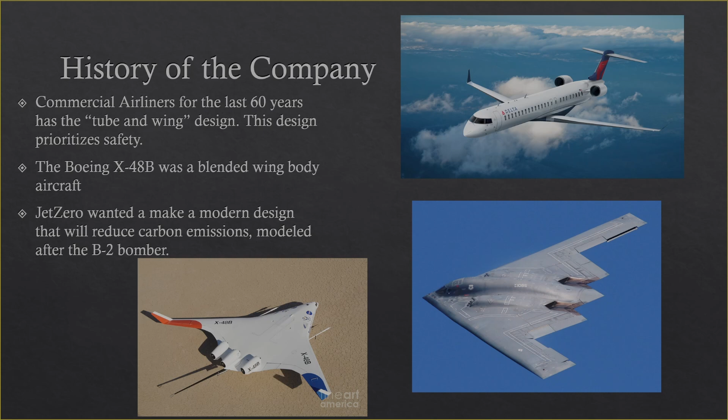Another thing for the history of the company, they designed and have flown the Pathfinder, which is a demonstrator aircraft. This plane has flown many different test flights and has been granted an FAA airworthiness certificate. The reason why this aircraft is more possible today is because of the new composite aircraft material. This material makes it so aircraft are more lighter, as well as able to pressurize at high altitudes, which is a very important thing for commercial airliners at high altitude operations.

The Air Force has also provided Jet Zero with funding. The reason why they have done this is because they want to support innovation and sustainable aviation for flights and everything. They also want to reduce carbon emissions.

I also have a quote from the Air Force that says, 'High aspect ratio wing decreases aerodynamic drag by at least 30%, providing additional lift. This increased efficiency will make extended range, more loiter time, and increase payload delivery efficiencies, capabilities that are vital to mitigate logistical risks.' So this is a very big thing that the Air Force wants to support.

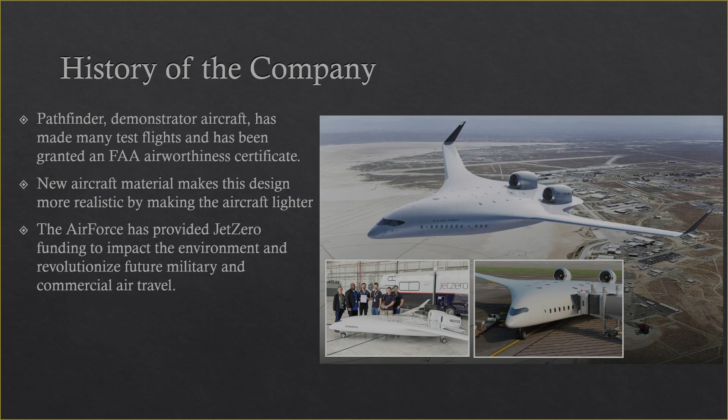Jet Zero currently focuses most of its efforts on the design of their blended wing aircraft. This work includes researching new ways to make their aircraft even more fuel efficient, more aerodynamic, and more consumer and user friendly, even reducing noise pollution effects by changing where the engines of the airplanes are placed on the aircraft.

With their ongoing research, a vital part of Jet Zero's work is to blend their findings into cold, hard metal. Jet Zero's use of building and testing prototypes of their blended wing aircraft has allowed the company to demonstrate to potential investors the reality of their goal and mission, and prove that they have the means necessary to bring the net carbon emissions of aircraft down dramatically with clever aircraft designs, better engine placement, and more efficient engines.

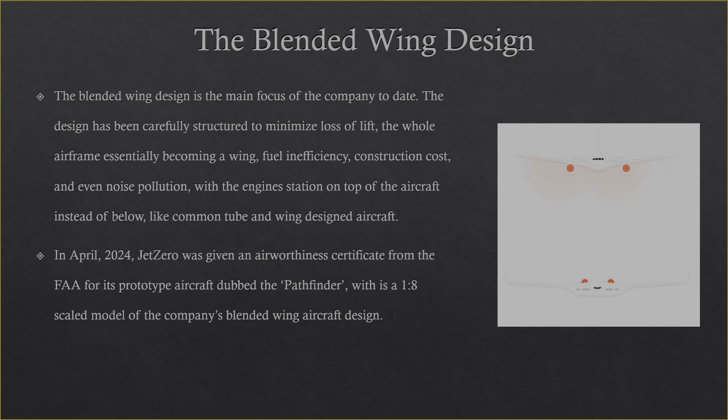As recently as April of 2024, Jet Zero has been granted an airworthiness certificate from the FAA to start experimental flights with the company's newest and most advanced prototype of their blended wing aircraft, dubbed Pathfinder, which is a 1 to 8 scale sized model of the company's future blended wing aircraft.

The entire aviation industry is invested in Jet Zero's mission, with the advanced aircraft model's plans to be used as a freighter, a military tanker, and a jetliner, each variant of the aircraft maintaining the same outward body but changing the interior and its components, maintaining the lift and fuel efficiency of the blended wing body.

The rest of the world, whether known to them or not, is also invested, with the promise of severely reduced carbon emissions content expelled into the Earth's atmosphere, which will bring us all one step closer to a safer future for Earth and its inhabitants, making the company's daily operations all the more important for all of us.

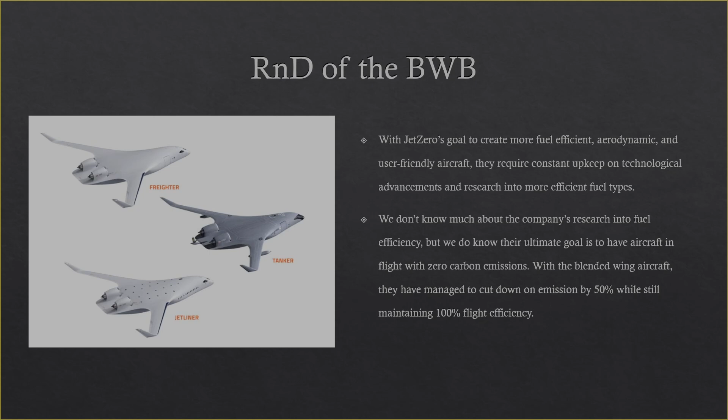Okay. All these efforts put into research and development of aircraft takes quite a bit of money. A steady stream of income is necessary to keep the company alive and operating, but the company has no finished product, no offer of services, and no current sales.

Therefore, to bring in its revenue, Jet Zero currently is funded exclusively through partnerships and contract deals. The blended wing aircraft is currently the future of efficient air transport, and all parts of the aviation industry want to be a part of it.

Jet Zero has investors in the forms of airline giants such as Alaska Airlines, as well as other aerospace technology advanced companies like Northrop Grumman. Perhaps their greatest backer, the United States military, has a special interest in the company's success, with Jet Zero signing on for a $235 million award bonus with the Air Force, NASA, and the Pentagon's Defense Innovation Unit.

Its blended flaws: it is more expensive to modify the design to create different size variants compared to a conventional fuselage and wing, which can be stretched and shrunk easily.

Pitch control and lift capabilities at low speeds have created a challenge for the blended wing body. The large wingspan can also cause issues because it may not be compatible with some current airport infrastructures. The average wingspan is about 52 meters.

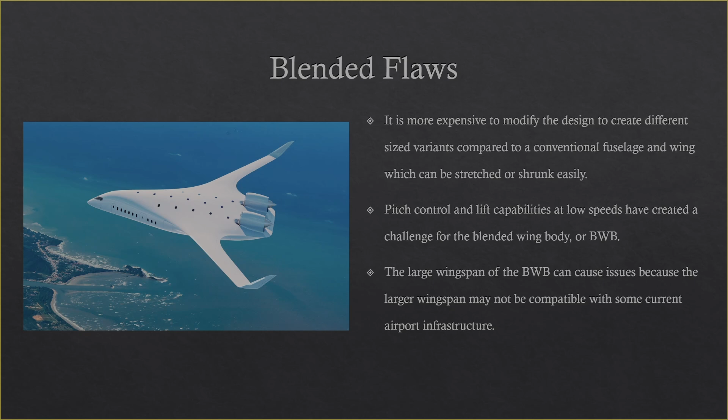While Jet Zero is still in its infancy and is a pioneer in its field, it is never too early to start looking towards the future. One only needs to look at a company like Boeing to see why this is true. Boeing recently came out with the B737 MAX, which was its answer to try and innovate its previous B737, which is still one of the most successful commercial aircraft of all time.

Instead of completely redesigning and building a new aircraft, they simply put two bigger engines on it. This has caused problems for pilots in the industry to handle these bigger engines, because it made the aircraft less airworthy.

Ways that Jet Zero can look to innovate are to do things like eVTOL aircraft, so electrical aerial ride sharing, flying taxis. The sky could one day have a new aircraft cutting through it, one that's much quieter, with fewer emissions, and potentially safer than helicopters and even planes.

This would be a great stepping stone for Jet Zero to move forward, because they'd be able to work towards their goal of zero emissions with a smaller aircraft. They could build public interest by looking into a flying taxi service, and there will be fewer regulations on personal aircraft if they wanted to move away from the commercial aircraft sector for a bit.

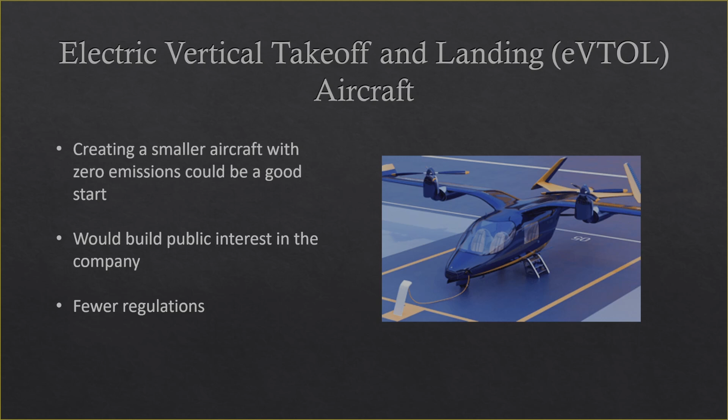They could also look into doing something like sustainable fuel production. There is a company called CARE-O-SENE that is already doing this. CARE-O-SENE, Catalyst Research for Sustainable Kerosene, is a German-South African research project for the new and further development of catalysts in the Fischer-Tropsch process. These FT catalysts play a key role in the large-scale production of green kerosene. With the help of optimized catalysts, sustainable aviation fuels can be produced more efficiently.

So moving away from traditional fossil fuels, doing hydrogen and CO2-based fuel could be an excellent way for Jet Zero to continue to innovate and work towards that net zero emissions goal.

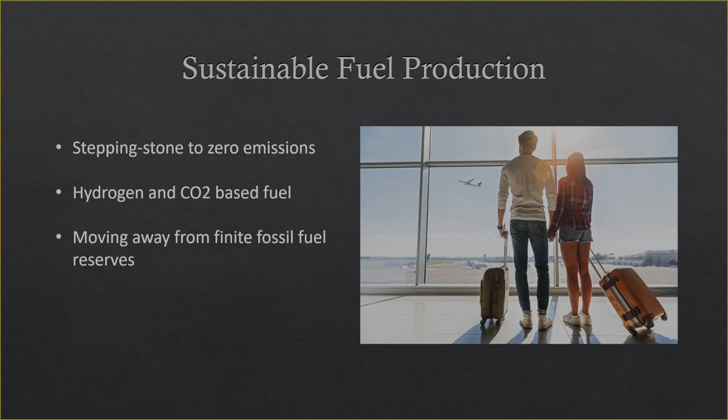Another way that Jet Zero can innovate is creating a sustainable aviation consultancy practice. This would help the entire aviation market grow. They would become a leader in this industry by helping other companies also work towards zero emissions. They'd be able to build relationships with airports and other companies for future endeavors in their business transactions, to be able to lift everyone in the industry.

A company that has already been doing this is called Airsight. Airsight supports airport operators, regulators, airspace users, and project developers to address the increasing challenges of achieving environmental sustainability today and in the future. Partnering with or creating their own practice could be an excellent way for Jet Zero to do this.

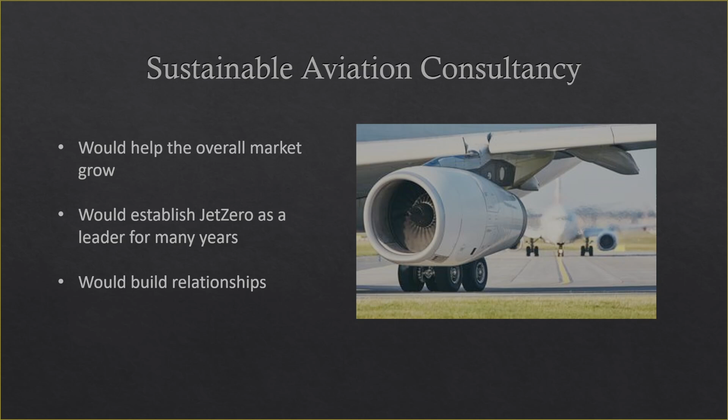JetZero is a company set out on making a new, more sustainable type of aviation airliner. As a company, they're focused on sustainability, they're environmentally friendly, and they've future-proofed their design by making it compatible with both hydrogen and standard fossil fuel types.

JetZero's dedication to this proof of concept and to their blended wing body design shows that the aviation industry as a whole is starting to head in the right direction towards a net zero carbon emission solution.

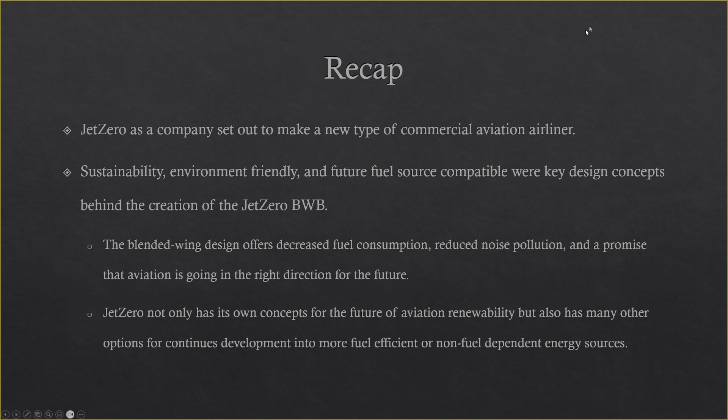Between their current venture of making the blended wing body a reality, selling it, and sending it on its way to making the aviation industry cleaner, they also have possible new ventures such as consultancies, eVTOLs, or finding new possible fuel sources. They are a prospect that is sure to be around for a long time, as long as they keep up the dedication to sustainability that they have right now.